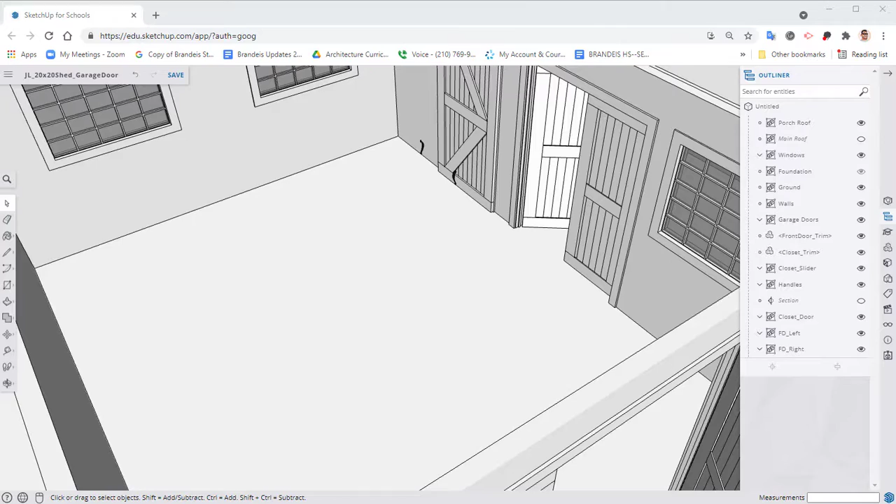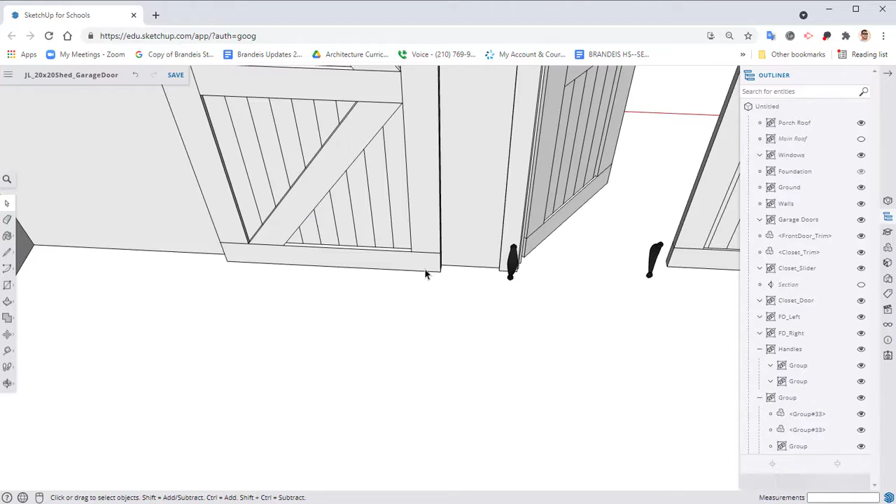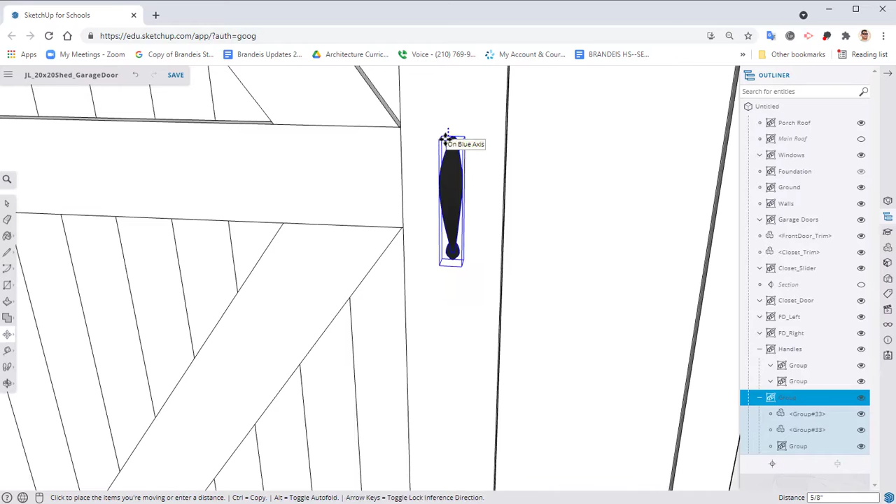So over here we have our handle. I'm going to make a copy of this handle and move it along the red axis. For this one, I'll go ahead and explode it. I don't need this one for my closet, so I'm going to delete that one. And this one, I'll hover over the back corner and place it onto my closet door, lining it up with the top of that bar, roughly centered.

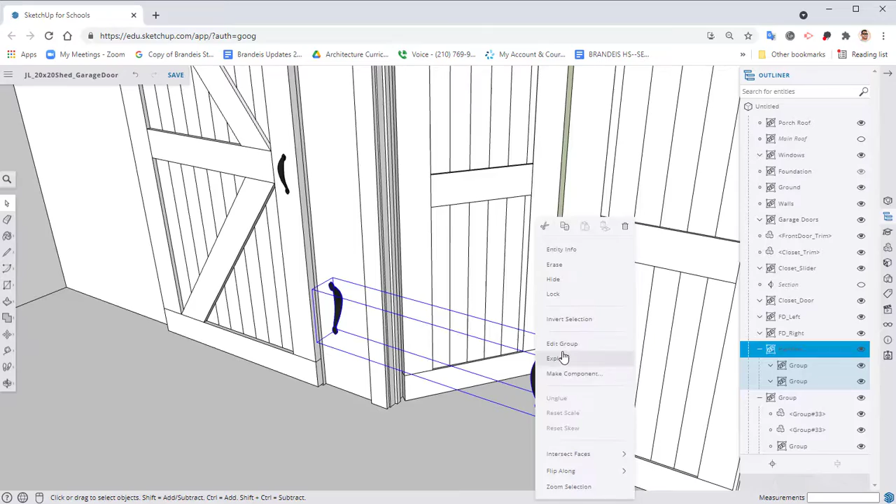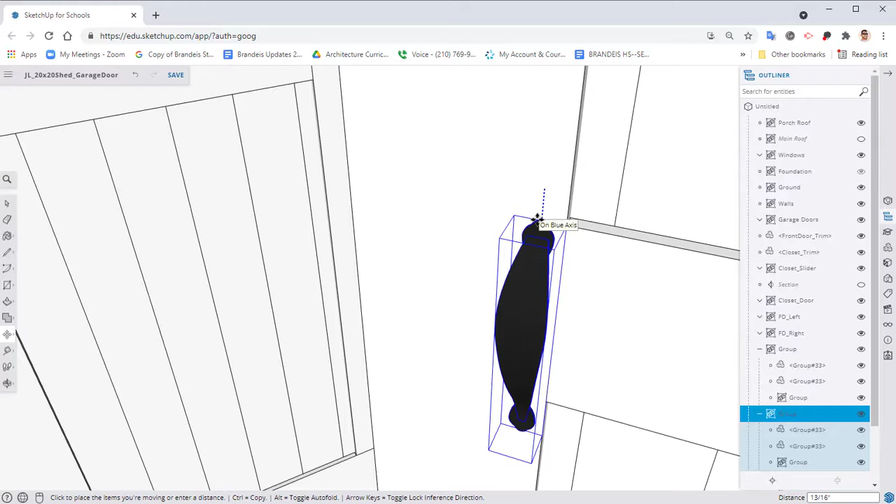Next, we're going to do the exact same thing here, so I'll explode this set. With my move tool, I'll hover over the very back corner and place it on the center of our board. You can use your keyboard shortcuts or arrow keys to make sure it aligns to certain axes—right arrow key to align it to the red axis, up arrow key for the blue axis, and so forth.

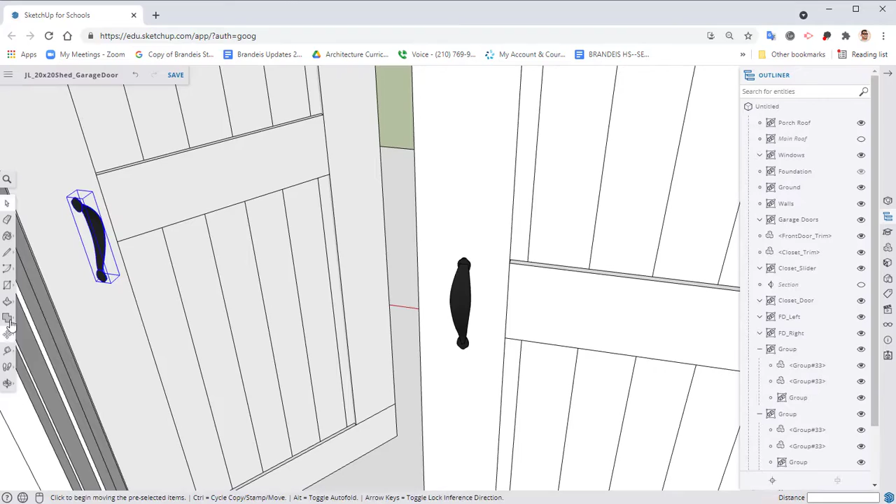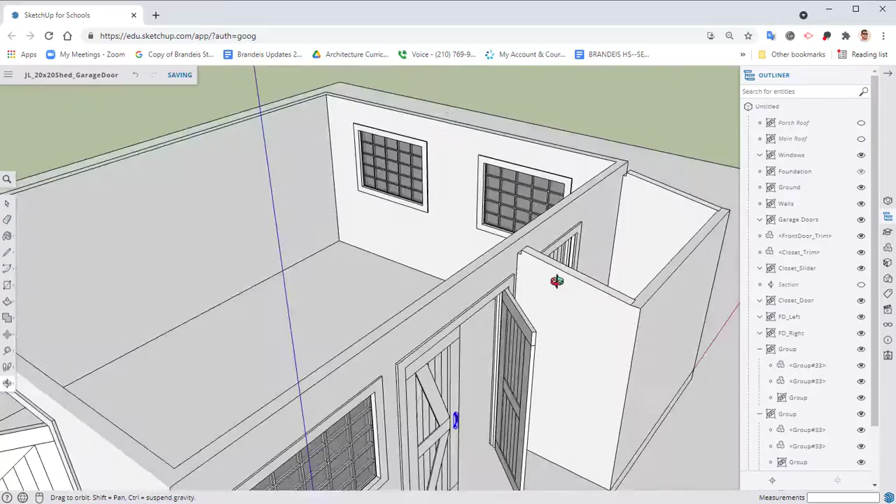Deselect all of that, select this left one, and we're going to move it to our other side. I'm going to hide my roof really quick. There we go, now we have both the front and back of this.

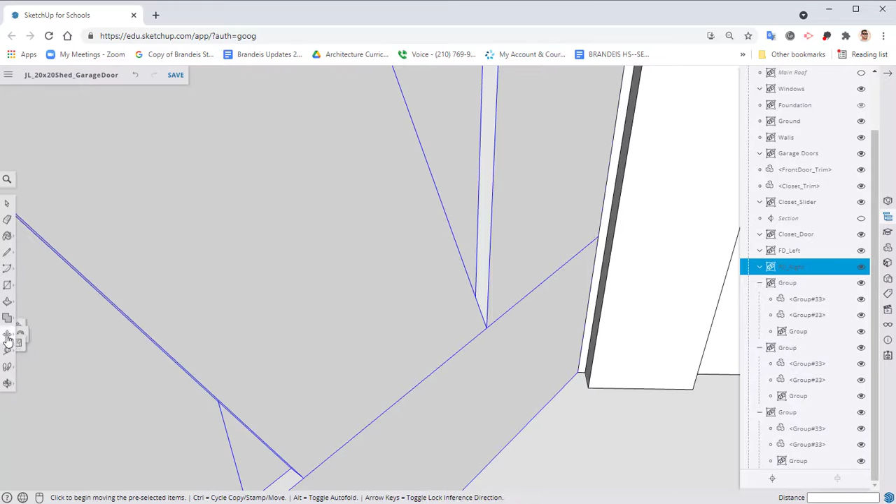If you're having problems, what we can do is close the door. So let's bring back our rotate tool, select the door, select your rotate tool, and we can rotate the door back closed.

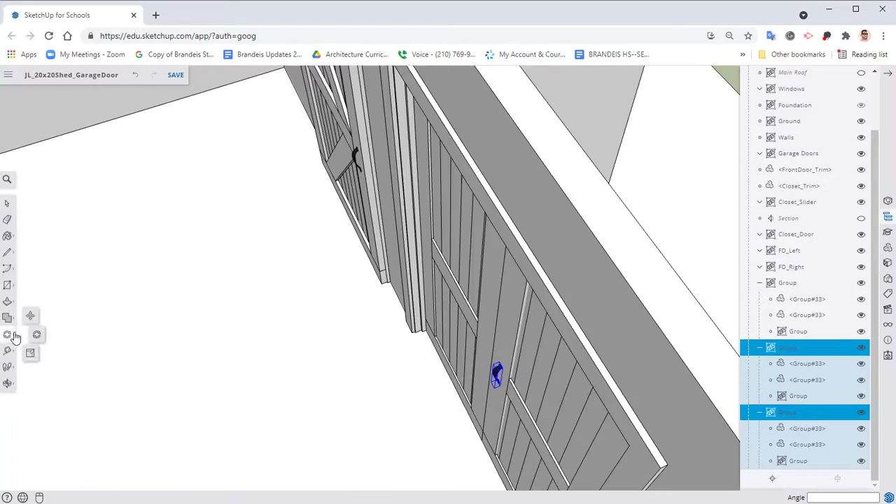Select our two handles again, select your move tool, and copy that over, making sure it goes along the green axis. And there we have that.

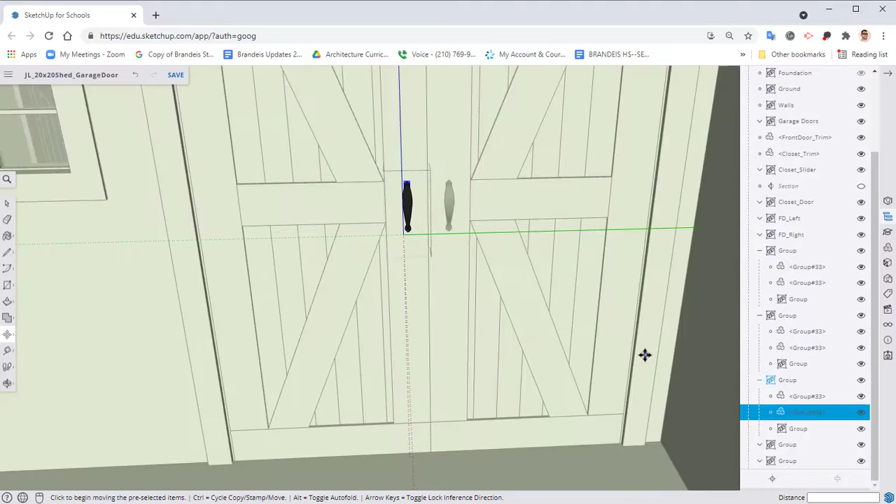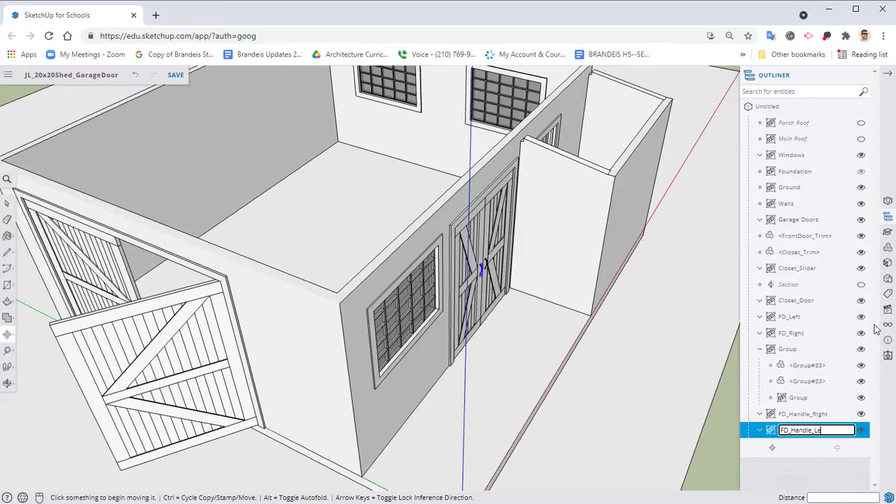So now with our front doors, what we can do is we have our two groups. We can click on one to figure out which one it is—these two are the right door, so we're going to group up those right there. I'll go in here and rename them as our front door handle right, and these two right here are our handle left. And we have our closet.

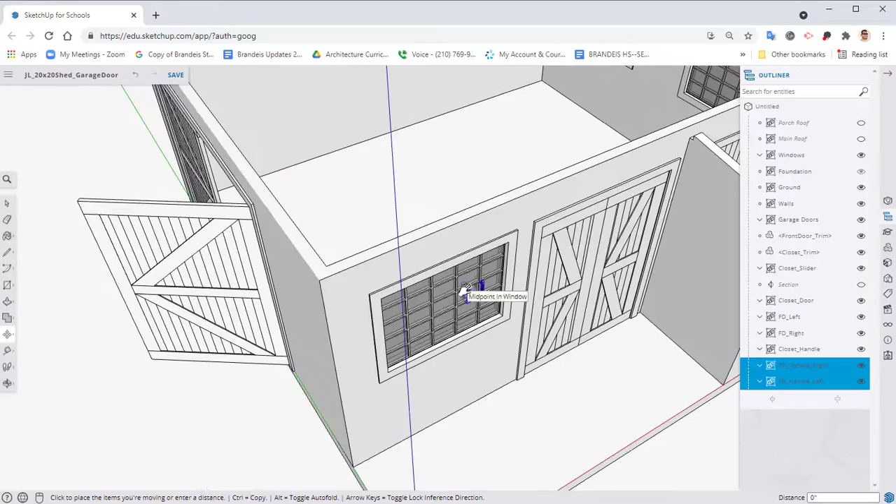So next, what we're going to do is actually click enter this time. Select both of these, select both of these with the move tool, hit control to make sure you make a copy, and let's bring them over here.

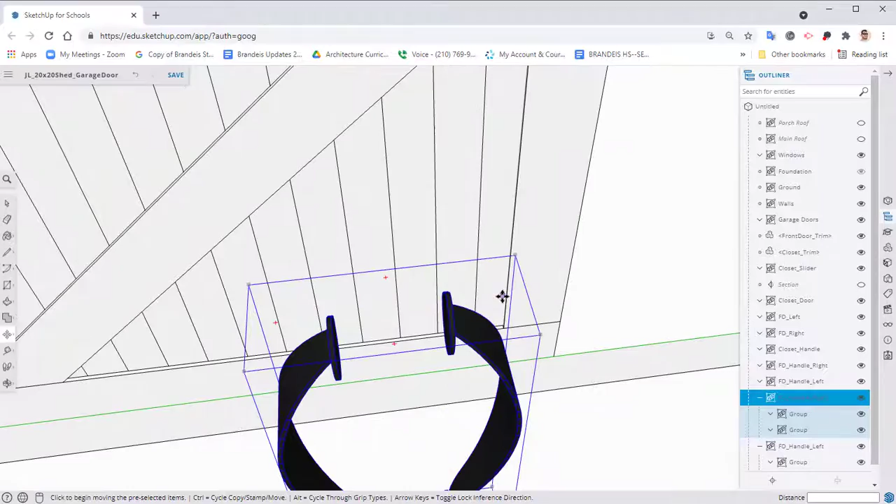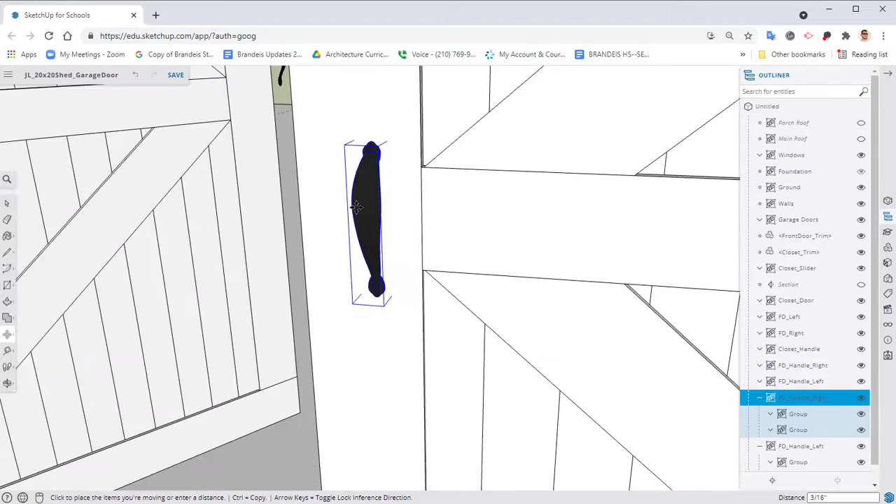First thing, hover over and rotate one of them around. Let's grab them from one side and place them on our door, trying to get them somewhere in the center. Again, you can use your keyboard shortcuts to line them up where you want them.

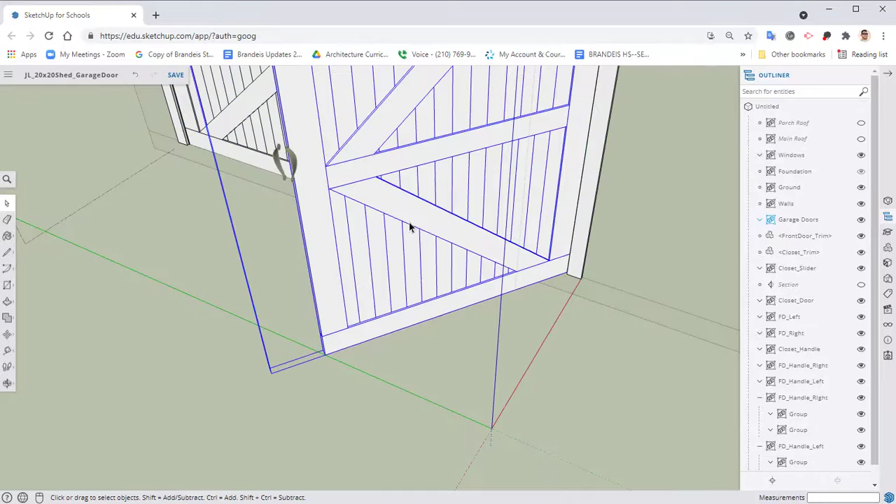Again, you're going to have problems with this particular angle, so let's go ahead and close our door. Go to edit group—this is the group right here—so we're going to bring up our rotate tool.

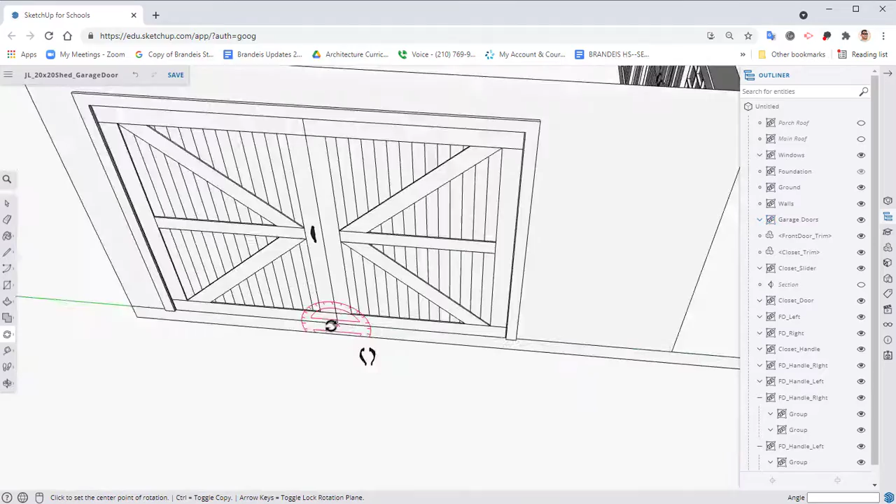Close our groups. Find that group right there. Let's go ahead and quickly move this one over. Here we can delete this one as we don't need it.

Over here in your outliner panel, we want to rename these. So this is going to be our garage door handle left. Make sure you hit enter. Rename this one, so garage door handle right.

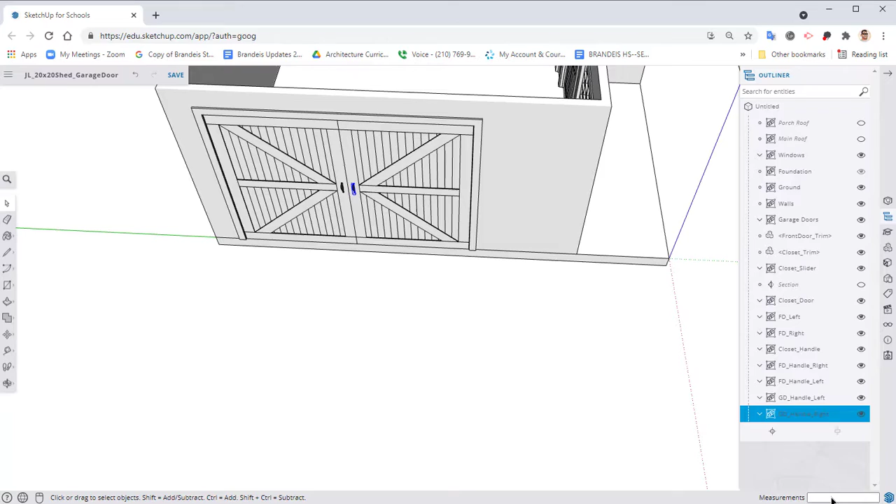If we want our handles to be in the same groups as our doors, here is it for my doors. What you can do quickly and easily is grab your two handles for our garage door. Click on one, hold down shift or control, click on the other, drag them up, hover over that garage door group, and click or let go.

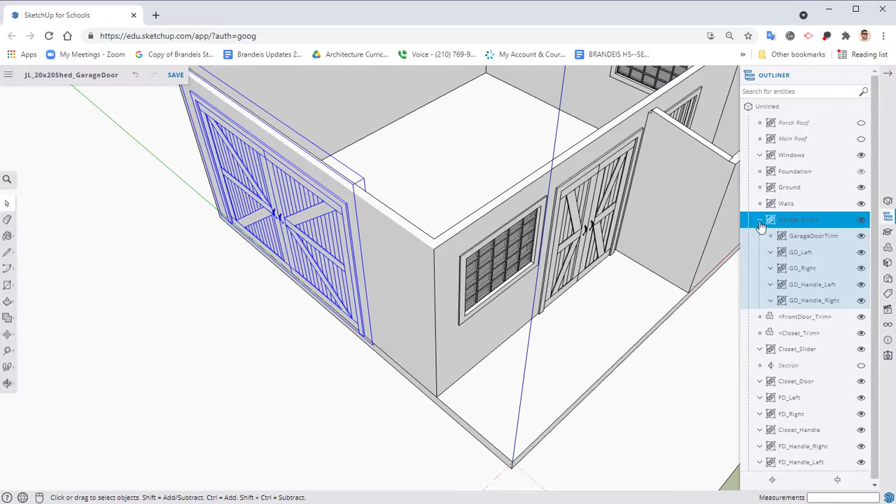Go ahead and grab the other one and drag that in there. So you can quickly and easily drag all of these around however you want to. So there is my garage door. I have a straight line.

Let's go ahead and look at our front door. So there is the front trim. Right here is the right and left handle. There is the right door, and there's the left door.

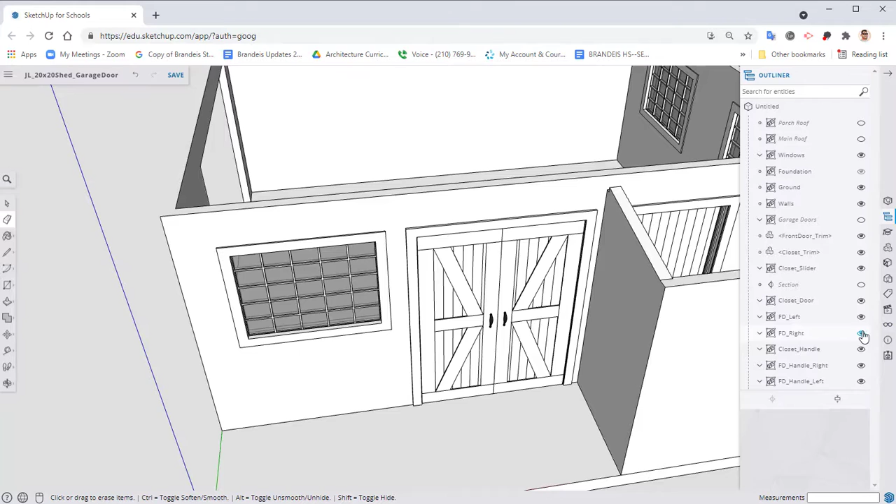So what we can do is take these, hold down control. Let's go ahead and click on all of those. Let's click on the front trim. Let's go ahead and right click somewhere on the blue item, and let's go ahead and make that a group. Let's go ahead and rename this one as front doors.

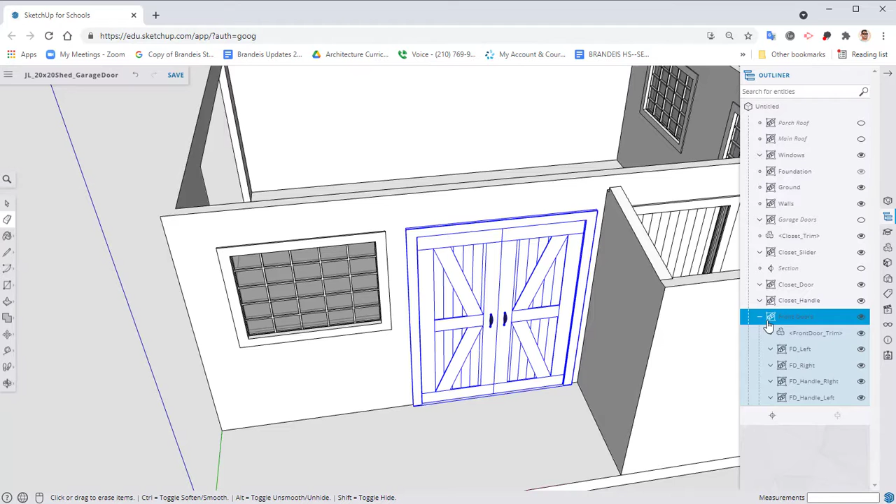So now if we hide those, the whole entire front door is closed or is hidden. For our sliding door, we got the trim, we have the slider itself, we have the door, and the door handle. One thing that I want to do is I want my door to be easily be able to swing from the slider.

So right now the slider has my sliders in it, so I want to come in here and I'm going to explode that. I have these two pieces here, so I'm going to take both of those and put those in the closet door.

So now if I turn off my closet door, those turn off. Let's go into here and drop the handle in that group as well. Then we can go in here and group up these two, the closet door and the closet trim.

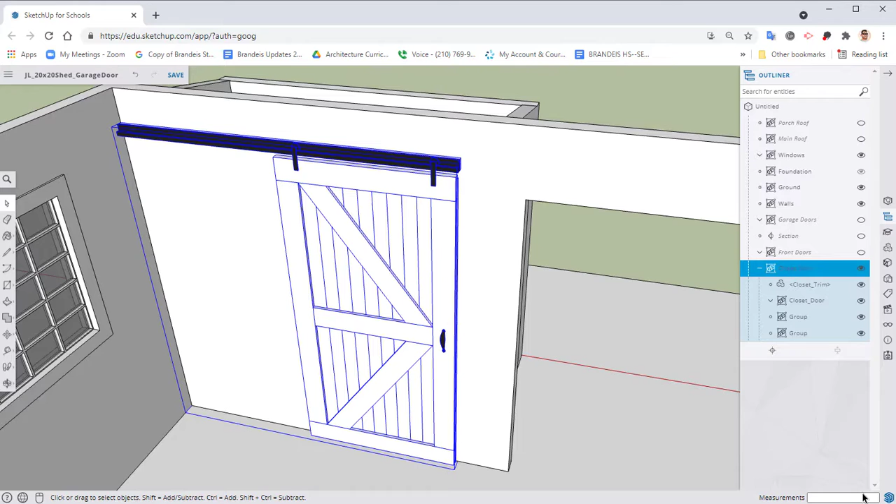Right click and let's make that a group. Rename this group as our closet door. If we turn that off, all of our closet door hides.

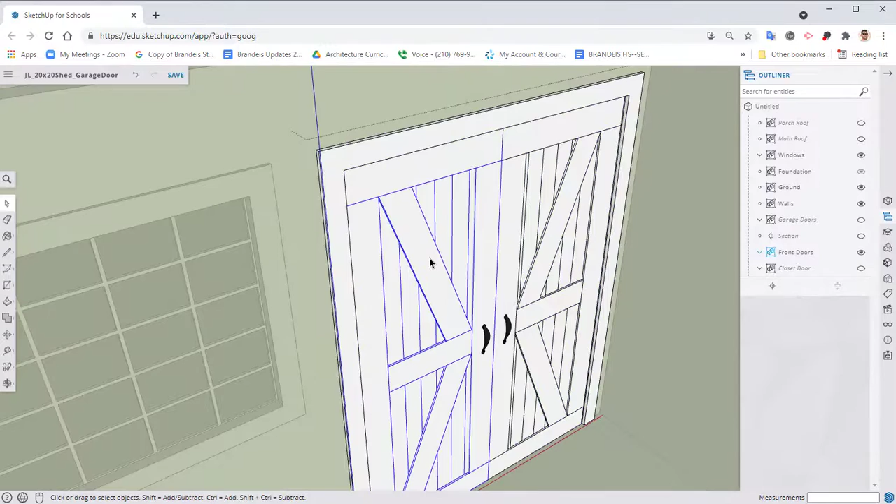Let's turn back on our front doors. We have one small part where we need to bring our brace back. So I'm going to edit this group. I clicked on this item.

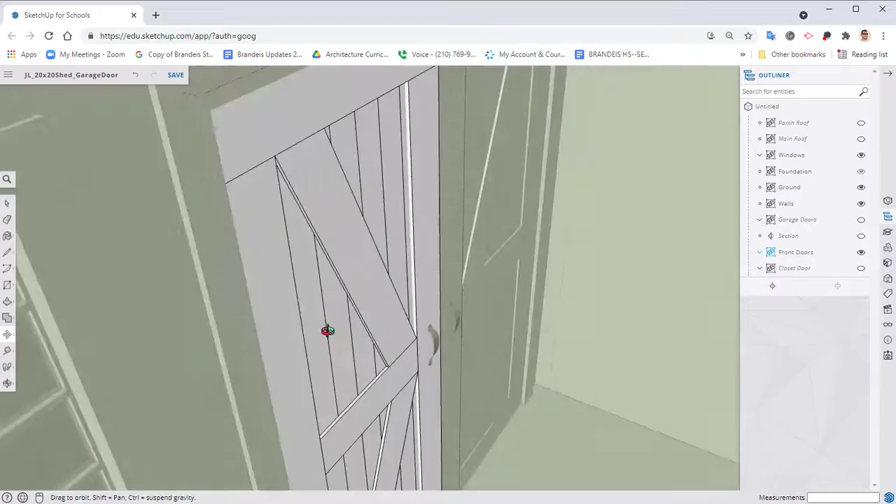Select both of those. Select your move tool. And we want to just move this back, copy it back, and bring it back over here. Set it down somewheres, and then you can come in here and reset it to where it needs to be.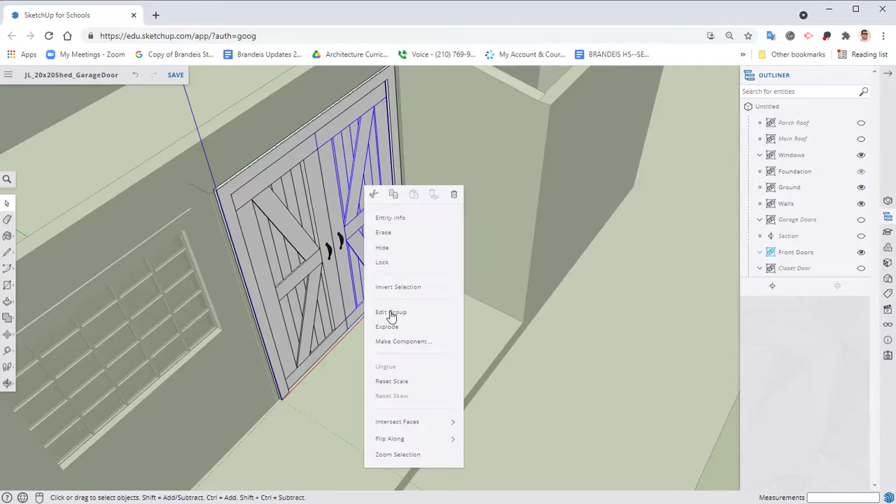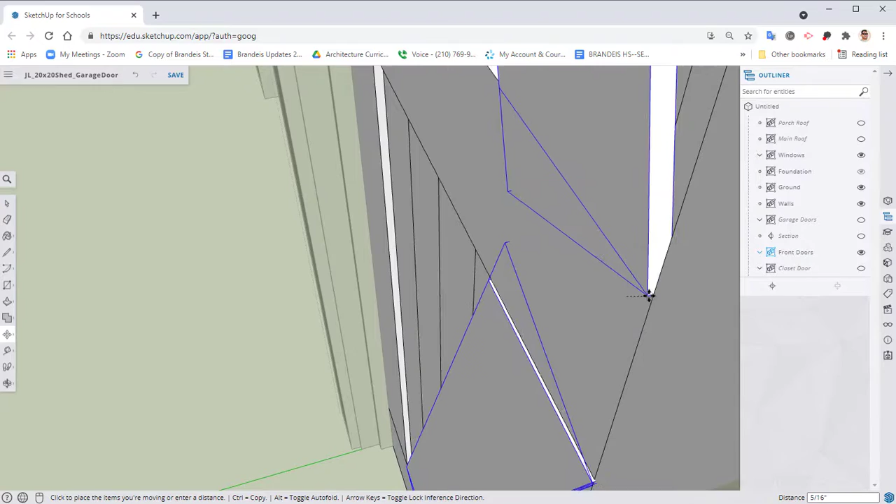Let's go out of this one. Let's go back into this one over here. Click on it. Make sure that it's only the board being selected. Hold down Control, click on your other one, select the move tool. We're going to again hit Control to make a copy, bring that right back, place it somewhere close, move your mouse to the other corner, and line up your corners.

Let's close our group. Let's close our groups. And now we can turn everything back on, and we have our project.

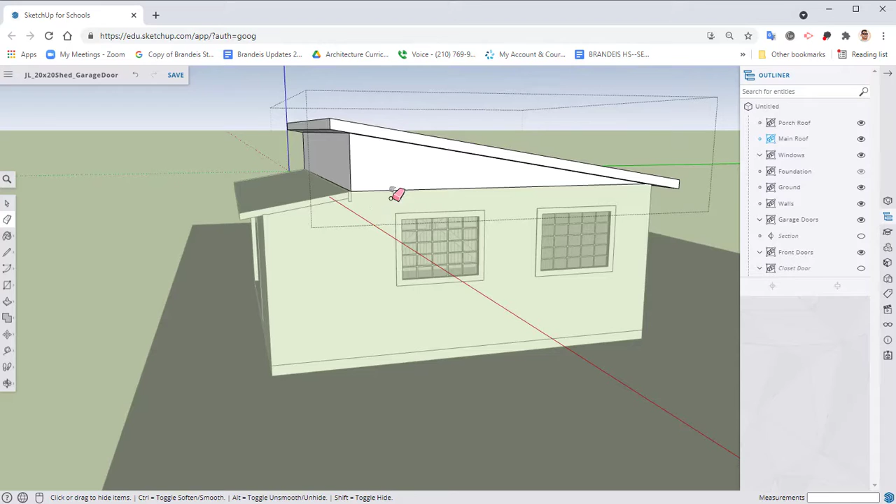Over here, before we get into our textures, one thing I want to do is I want to go ahead and edit this group. Take your eraser tool. Down here you'll see where it says Shift equals toggle hide. So I want to click on the Shift key. That's going to come up with that little gray icon on your eraser tool, and I want to erase that line right there. Close our group, open up our group for our walls, and do the exact same thing there.

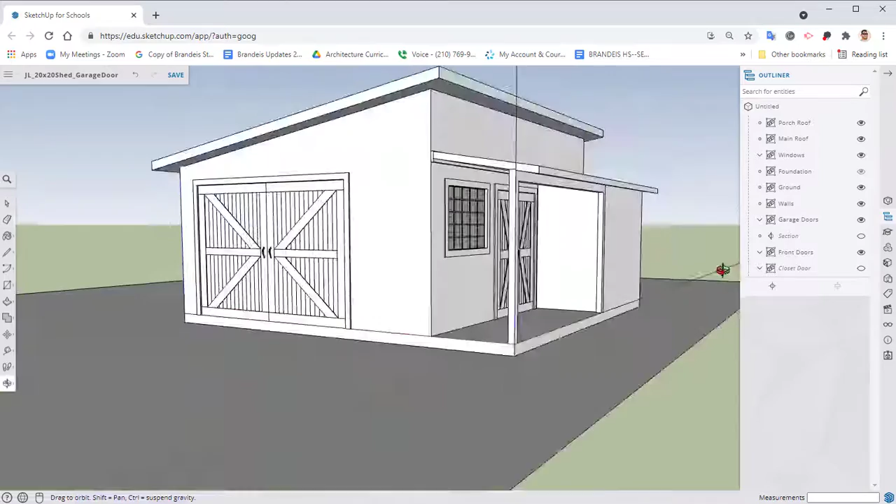I'm not erasing it, I'm just hiding that line. You got to do that with both the top and the bottom group. Right click, close group, and now that line is no longer there. So if you haven't done that yet, you can do that for the left and the right side there if you haven't already. But that finishes up this part.

We will have another part where we go and take a look at textures and materials.